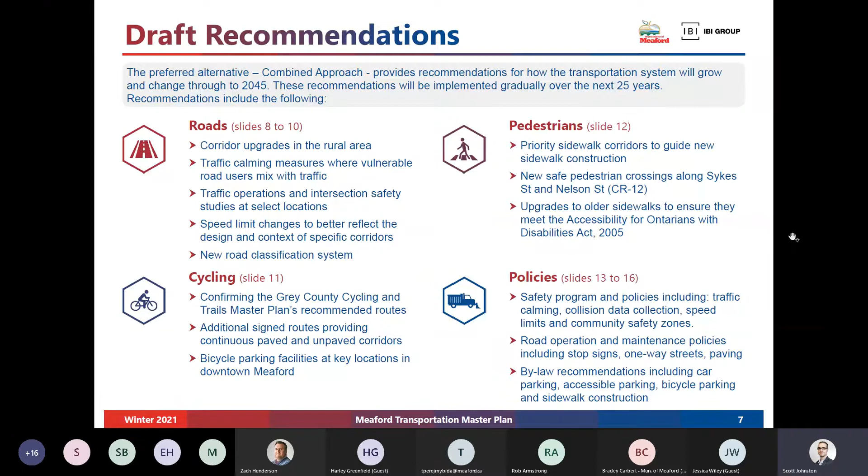So those are the broad recommendations. I think it's worthwhile pointing out that the TMP has found issues, and we've got recommendations. Not all of these recommendations are expensive, but there's quite a few good things in here for the municipality, and we'll explain what those are.

Starting off with rural roads. Through our review and problem assessment, we came up with these preliminary recommendations for rural roads. I should mention that we are gathering feedback on these, and so we'd like to hear your thoughts as well, and we're in the process of gathering feedback.

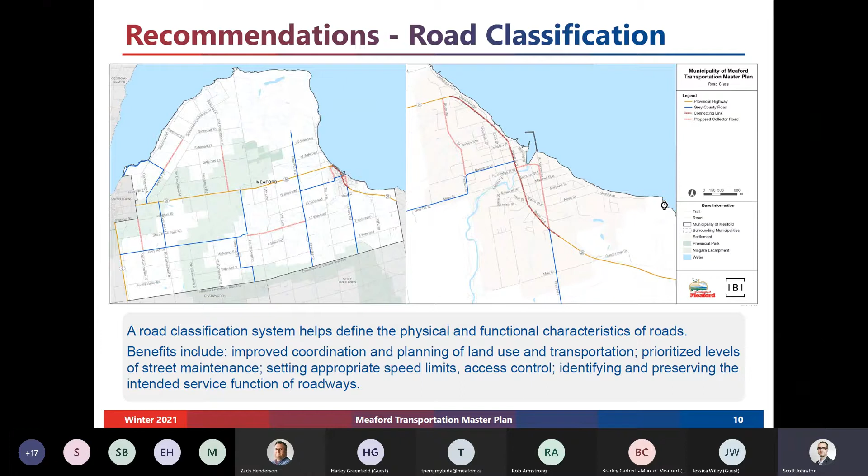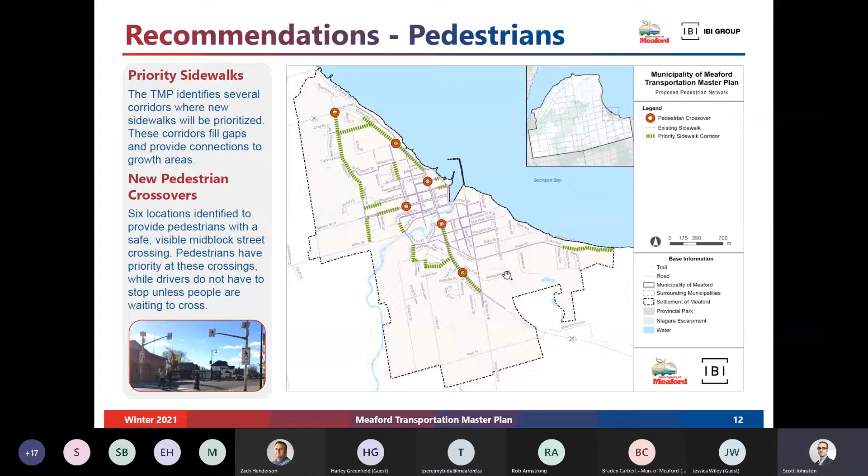Just to mention, this is a great example of infrastructure that doesn't necessarily cost a lot of money. They're quite cost effective and really can provide an enhancement to the look and feel of Meaford, making it safer to cross the street for people.

Okay, so there's several more slides of recommendations. I'll try not to go through them in quite as much detail as the previous one. Everyone is welcome to look at the slides and provide feedback, ask questions, specific or general. All questions and feedback are welcome.

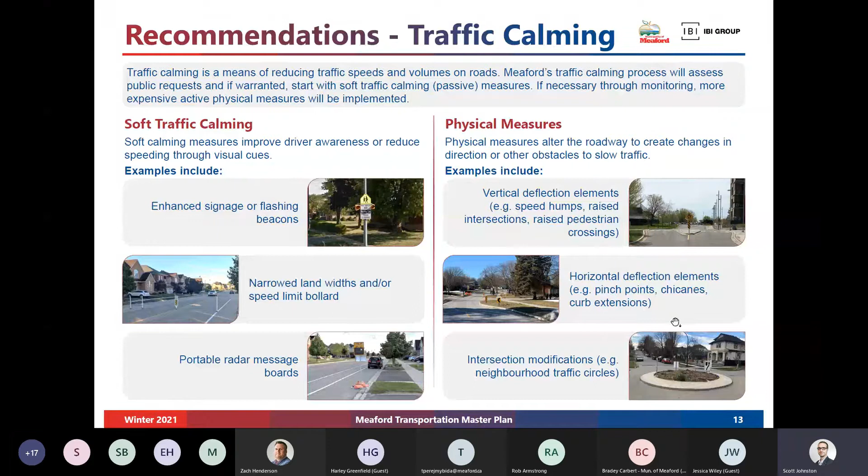So that's traffic calming. Looking into other policies and recommendations: a road safety policy and program. Safety is a priority in managing and planning the network. The recommendation here is for the municipality to review collision data, collect it regularly, and review it, looking for problem locations that have excessive numbers of collisions, and then on a case-by-case basis reporting those findings to council to determine next steps.

It's important that resources are limited. The municipality can't necessarily address every problem location or every location where there are collisions, but by looking at the data, perhaps identifying priorities and the need for capital budget to address safety improvements over time, and also coordinating with OPP. Traffic calming we sort of covered. Community safety zones are another policy area.

Community safety zones typically have lower speed limits. One of the challenges the municipality faces is enforcing those. The police typically don't have enough resources to stringently enforce the community safety zones. So one of the items we identified was to consider partnerships with the county or others into automated speed enforcement, as a way to improve compliance with community safety zones.

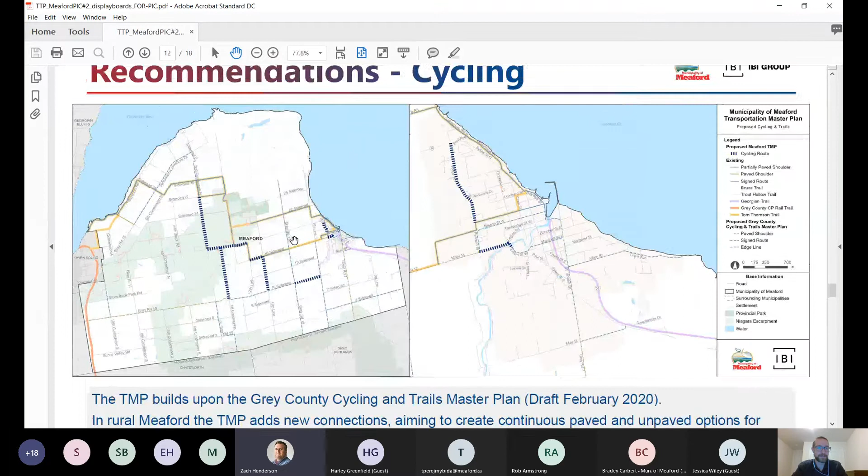Sure. As Zach said, we're trying to look at the needs and opportunities, recognizing that cycling is actually a rapidly growing tourism industry. Touring cyclists are a growth area of the economy, and Meaford has great roads for cycling. Today, there's no paved access for cyclists to get to the northern parts of Meaford, so that was a gap we identified and thought could be addressed through the paved loop, which serves more functions than just cyclists, but the cycling network could take advantage of it.

So we want that mix of paved and unpaved options in the rural parts to support the economy, and in the urban parts, there's also support for touring and recreational cyclists. There's potential for cycling infrastructure, signage, and routes that increase driver awareness and help with safety, along with potential bicycle facilities on some of these roads, since they can improve safety as well.

Scott mentioned the paved loop, and how we're calling it a cycling route but also a collector road. Bill Abbott had a comment about that: how do we reconcile directing more traffic toward a cycling route? How do the two things coexist in this plan?

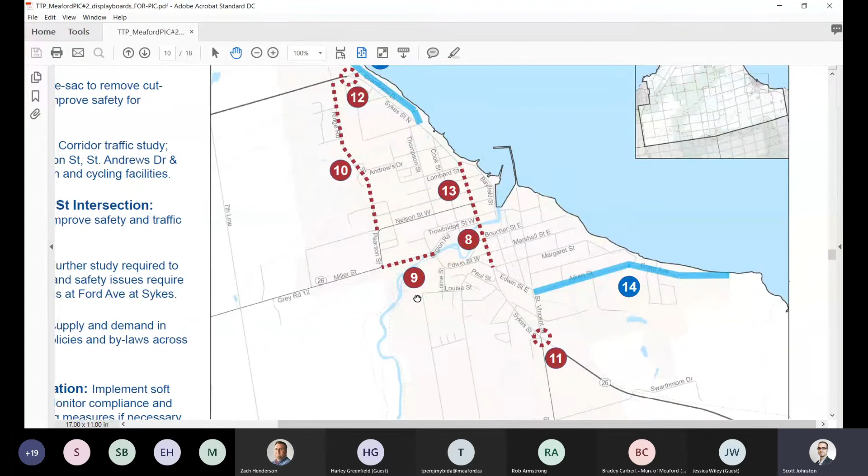I guess for the purposes, one of the things we probably could have done was prepare the aerial image, but for this presentation, this map is probably sufficient.

So right from the get-go of the TMP, we heard both from staff and from the public in our first consultation that safety along this street is really a concern. It's narrow, there's no traffic protection, no guardrails adjacent to the river as it gets close to Edwin Street, and we also heard that some traffic is traveling much too fast on this road.

That was kind of the reason we looked at different alternatives. There's even another concern up at the Sykes Street intersection of potential sightline issues for crossing, because of the bridge over the river.

So we were looking at different alternatives. It was actually an idea that came, I believe—Tori can correct me if I'm wrong—originally from the public, a comment that this road could be cul-de-saced. The concern was that this road may be being used as a through route for traffic from the west, but it is a residential street and currently not designed as a collector road to accommodate that through-road function.

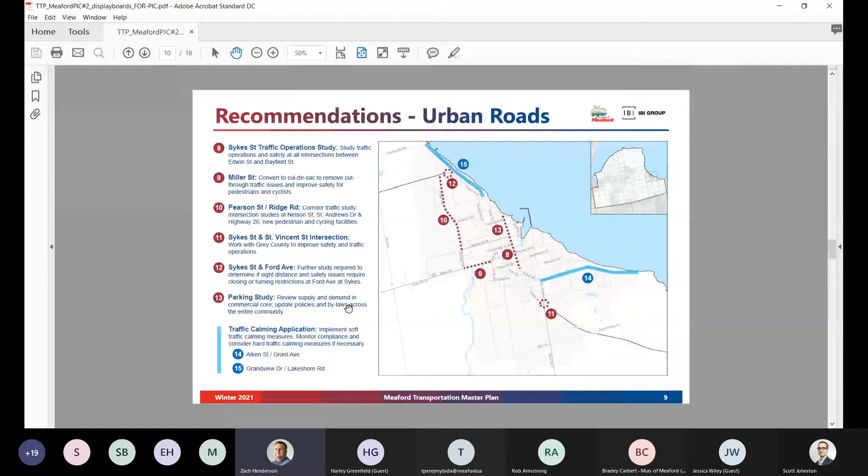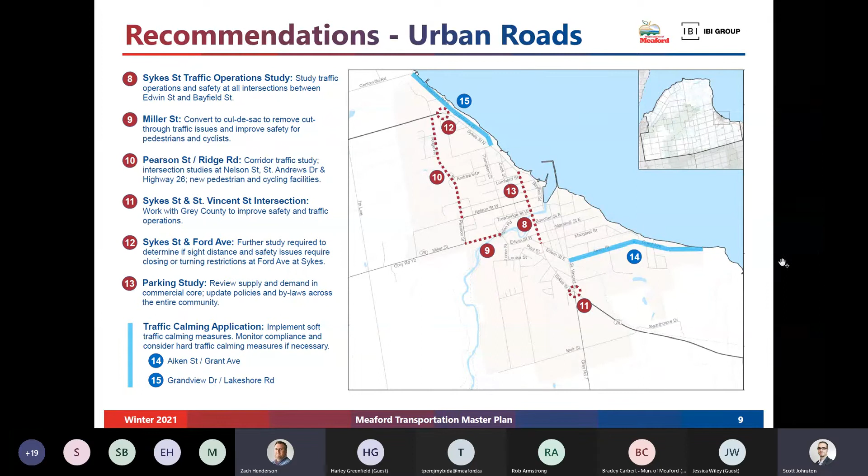This is actually part one of the Miller Street question, but it relates to how we are going to do traffic calming on some of the rural roads. Traffic calming maybe evokes a sense of more urban activity, but how are we going to apply it to slowing down traffic near some of those pockets of population areas that are on rural roads?

That's a good question. From my perspective, the policy that we developed would generally apply: when concerns and requests come to municipal staff, they would review it, assess whether action is warranted and justified by looking at the speed of traffic and the volume of traffic on the road, and if justified, follow a similar process of soft calming and then consider other interventions.

Now for rural roads, the toolkit is a little more limited—the types of tools that could be used, like placing signs and so on, might be more constrained—but generally that process would be followed. I'd also point out that the other recommendation is that speed limits would be reviewed on an individual basis, following best practice guidelines.

Tied to the traffic calming and safety program, speed limits could be looked at by staff using the provincial guidelines, and considering a reduction in speed limits.

I'd like to add to this, hasn't been shared publicly yet either, it's kind of too detailed for that. Part of our approach on traffic calming is to provide a transparent process everyone can follow. In rural areas, recognizing that some streets have low volumes, even if you have 100 speeding cars a day, that's still a significant hazard. So we look mostly at speeds in rural areas rather than relying on some sort of volume that may never materialize.

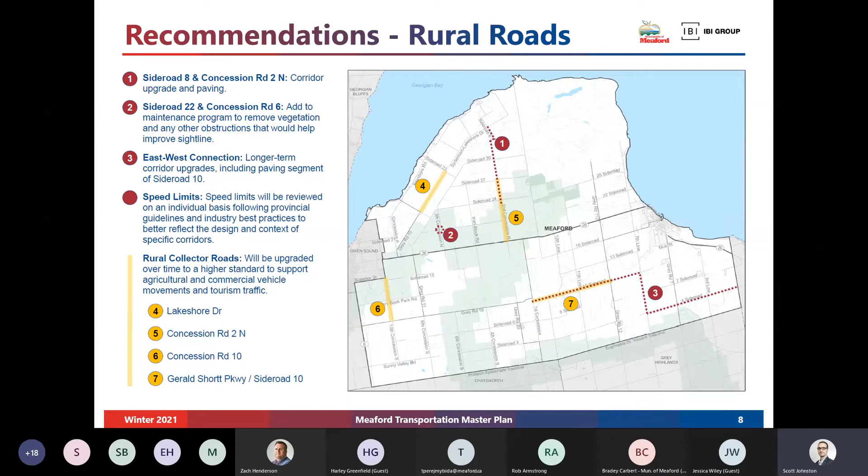That's a good comment, we can take that back and talk about it with the project team. I think that's a great comment. When you fill out your comment sheet, if you can mention specifics like locations where you think there's a parking shortage that wasn't considered or wasn't mentioned today, we'd like to hear that in your feedback.

During our first round of consultation we asked about parking, and I don't recall we got a lot of comments, as we saw earlier over 300 responses to that survey. I can't offhand recall any complaints about a parking shortage. There always kind of feels like there is, but it hasn't made it into the plan at this point, though it's definitely something that can be looked at.

Okay. Got all out of order here. Sorry, just bear with me for a second as I try and find something new to discuss.

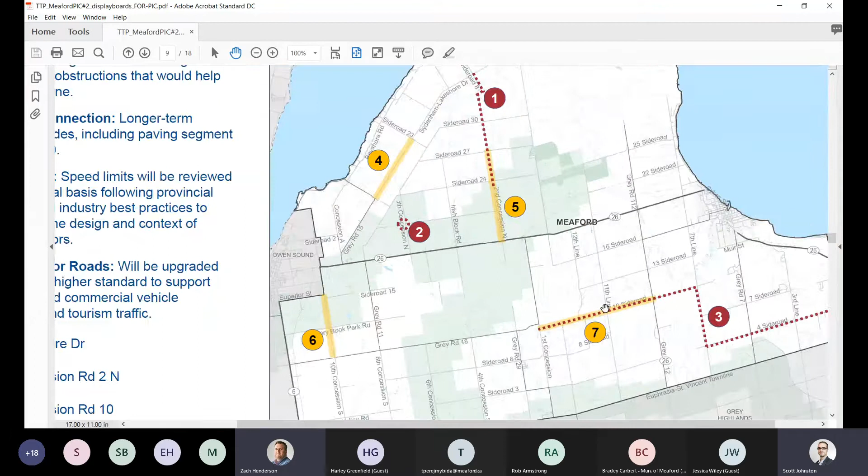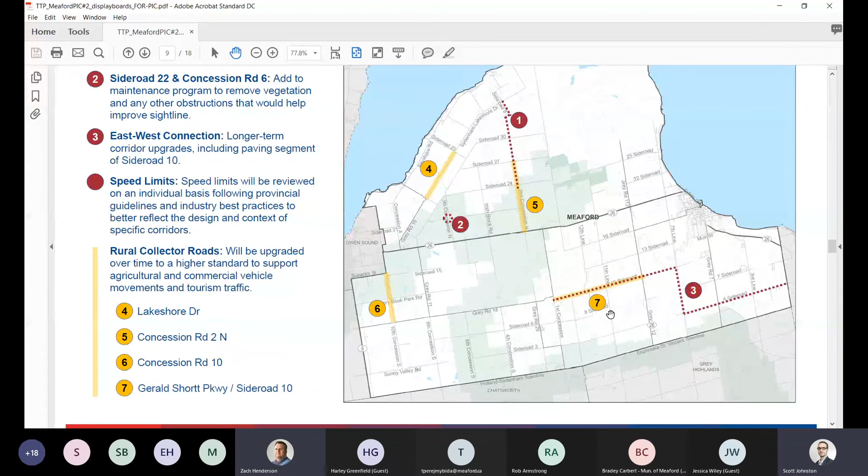Okay, so I guess another question regarding Sideroad 10. Scott, you actually did mention this a little bit, maybe we can reiterate it. Bill Guest was pointing out the major vertical curves on that road and how we are going to deal with that, and how is it going to be possible to design something where agricultural vehicles can use the road still, as well as trucks. That's the kind of concern we have.

Yeah, it's a valid question. We're trying to develop a plan that targets, you know, we're looking fairly far out, 25 years into the future, so we don't want to be too constrained where there could be a potential cost of improvement if we feel it's valuable. One of the comments we heard quite strongly, both during the public feedback round 1 and through our consultation with the agricultural community and industry, was that there is a need for an east-west connection.

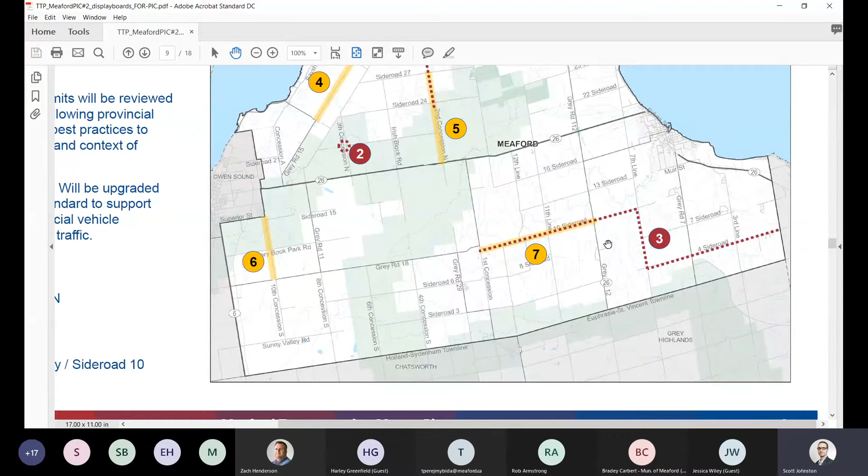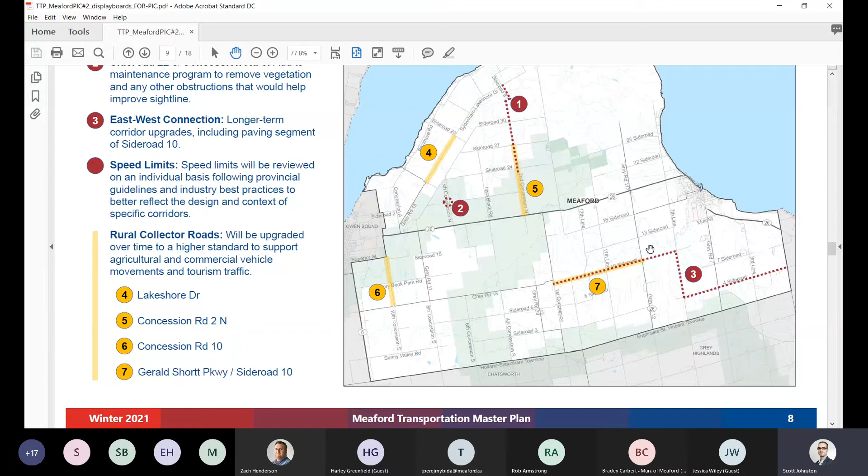But we do recognize that the gradient would be a huge barrier to actually making a proper collector road that meets appropriate design standards, and that type of investment would be too high for Meaford to bear on its own. So what we've identified is that it could be upgraded as a cycling route or designated as a cycling route and put into a long-term plan. Roads like this that meet an identified need in a transportation master plan can also open up other funding opportunities such as provincial funding, so there's value in putting those desires into the plan. I'm not sure if I fully addressed that question, but we do see the value of it from a cycling perspective and from a connectivity perspective for goods movement.

Okay, thanks Scott. I'm kind of running out of questions, but I have a couple comments I'll add in here. Okay, now if I can find them again.

So the new school is at the southeast corner there of St. Vincent and Sykes. Yeah, right there. So that's a good comment.

And so on the county cycling plan, St. Vincent Street is identified as a cycling route, and it does fall on that plan. For our plan, we haven't identified other roads in this immediate area to be added to the county cycling plan, just that it would remain as St. Vincent Street for the primary cycling route. I believe Sykes Street itself, I don't know if there's too much opportunity for converting that into a cycling route. So I think it has been captured in the cycling plan, the new school, but...

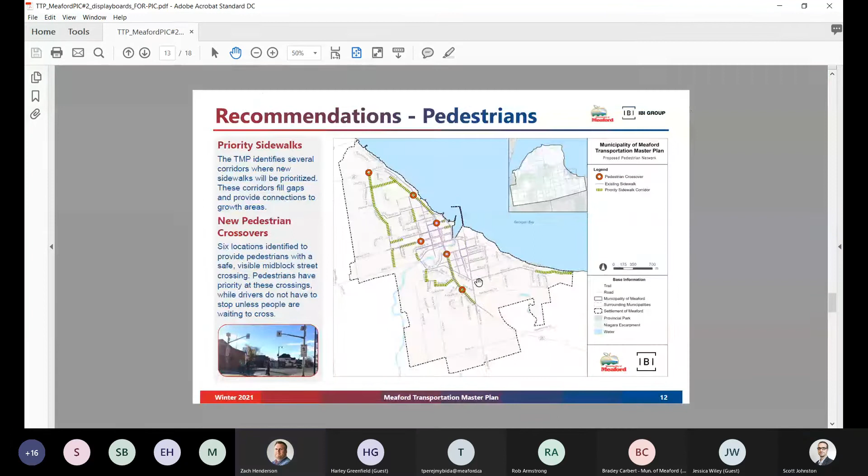Oh, that's a great addition, thanks Zach. Yeah, and if you want to just flip to the sidewalks, maybe quickly. Sure. I think one of our priority corridors there is extending the sidewalk on both sides of Sykes to make sure we reach that school, and also providing a crossing opportunity at Coleman Street there, which could help some people get around that area and towards the school.

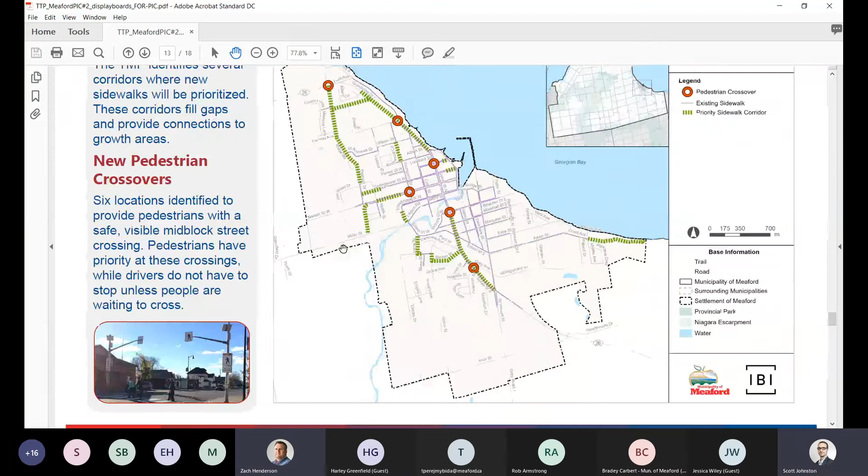Okay, I've got a new question here from Ross Kentner. Have you looked into the challenges that agricultural traffic has in the Bognor area with the steep hills, especially in the winter?

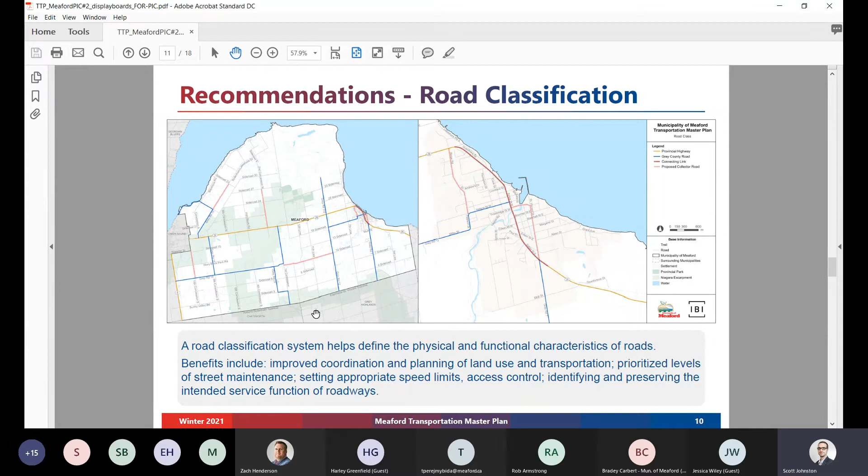I would say that we have looked at it, and it did form part of these recommendations. Sorry, I'm going to go to the rural roads plan. And I would say that we're continuing to engage Stefan, one of the representatives of the agricultural community, and we're looking further at the Bognor area and the needs as part of the consultation that we're doing right now.

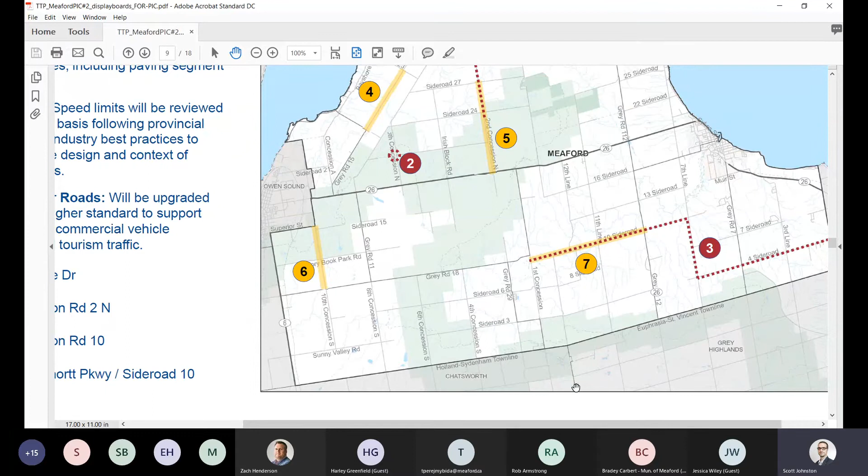So if you have any specific comments about this area, we would like to hear them. This was the plan that we developed so far, and we're interested in gathering further comments on the Bognor area specific needs. Yeah, we'd definitely really like to hear input on that specifically. Please do submit your comment form, and we like to hear specific comments about your feedback there.

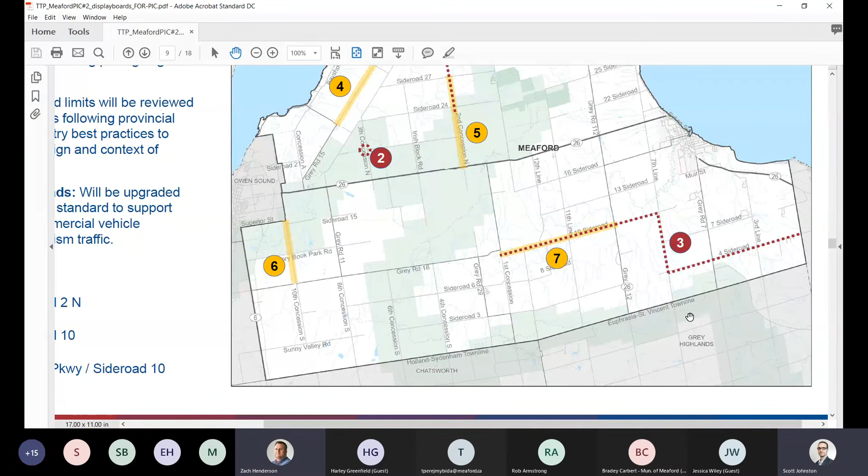Can you flip to cycling real quick? I'm just going to quickly address Ross's follow-up question here. Sure.

So Ross, you just noted that you don't see the Georgian Trail, but it's there in kind of like a light purple, maybe a little bit light. If you go to the urban part, Scott. Oh, I see, yeah, the Georgian Trail there connects kind of downtown Meaford over to Thornbury.

Hopefully that addresses it. So, for the record, Ross says there should be provision for people to walk and cycle as much of the shoreline in urban Meaford as possible. That's something I think is looked at as part of the waterfront master plan that Meaford has done. I know there's some good stuff there, but from a transportation perspective, we're highlighting corridors. We haven't highlighted anything specific along that waterfront, although there are a couple segments where there's little gaps in the sidewalks.

Okay, so Jessica followed up on Miller Street. I don't think we're going to have a good answer for this, but do we have a timeline in mind for Miller Street changes? No, I think the answer is no right now, but...

Basically once the TMP is accepted, then generally what that means is that the need and justification for a project is established through the EA process, through the provincial process. Once a project is identified in a TMP and the TMP is finalized, then the municipality is permitted to proceed with phase 3 and 4 of the EA, which is design solutions and implementation. So basically the municipality would have the flexibility to start looking at implementing that within the next 10 years, timing to be determined. Tori, please jump in if you have any thoughts on timing that I didn't cover.

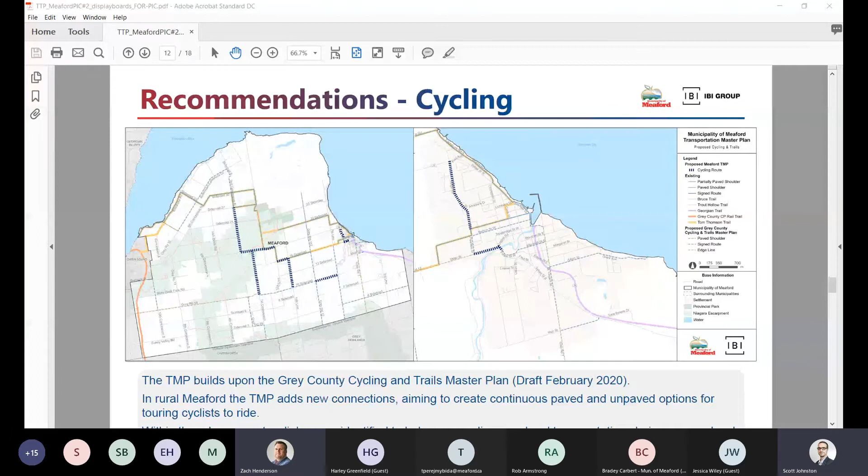Question about pedestrian crossovers: how will they impact traffic on Sykes Street? Sykes is obviously a very busy road. If we're proposing a bunch of crossovers, how is that going to impact travel times, bottlenecks, that kind of thing?

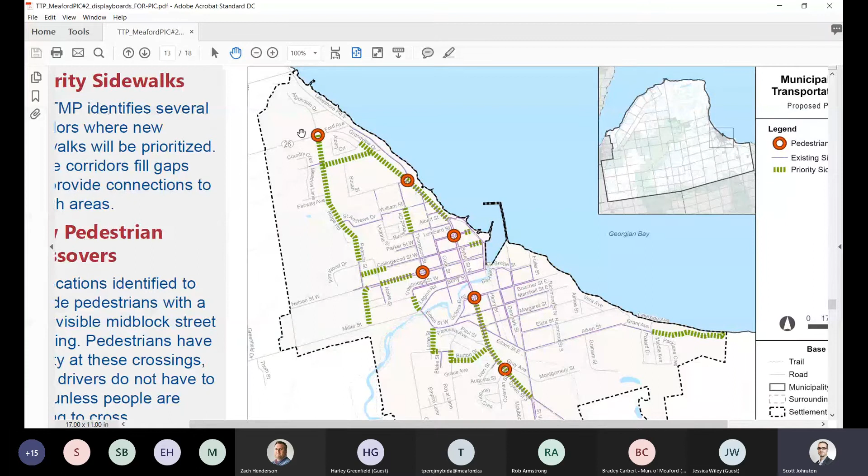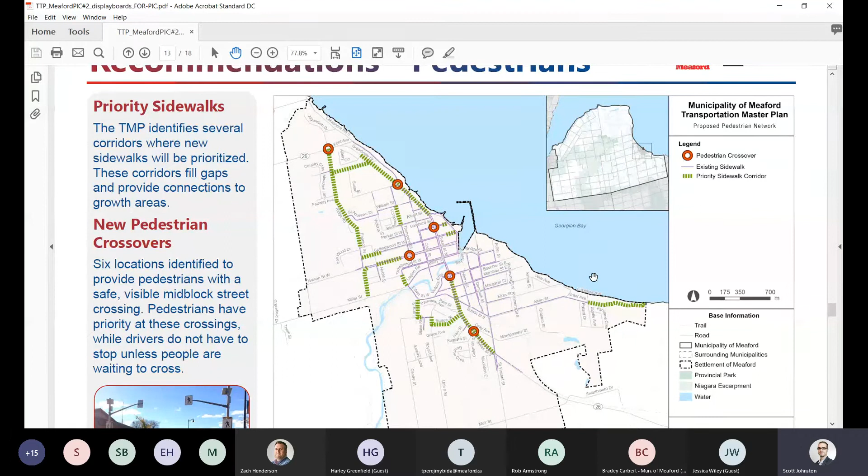That's a good question. We haven't done a specific traffic analysis of these locations, but generally pedestrian crossovers don't cause significant delay to traffic, because the number of times per hour they get cycled is relatively low. And as you know, there's already gaps in traffic provided by the signals along Sykes Street, so it's not too different than traffic signals in terms of the short-term delay for drivers needing to slow down and stop for a pedestrian crossing. The delay is actually quite limited, because once pedestrians are clear of the roadway, drivers are permitted to continue through.

It's kind of a trade-off. The alternative is a full traffic light, where you have to wait whether there's pedestrians or not a lot of the time. In my experience walking and driving around cities, you see a pedestrian, it takes them 10 to 20 seconds at most to cross the street, and then you're on your way again quite quickly. Okay, hopefully that answered the question.

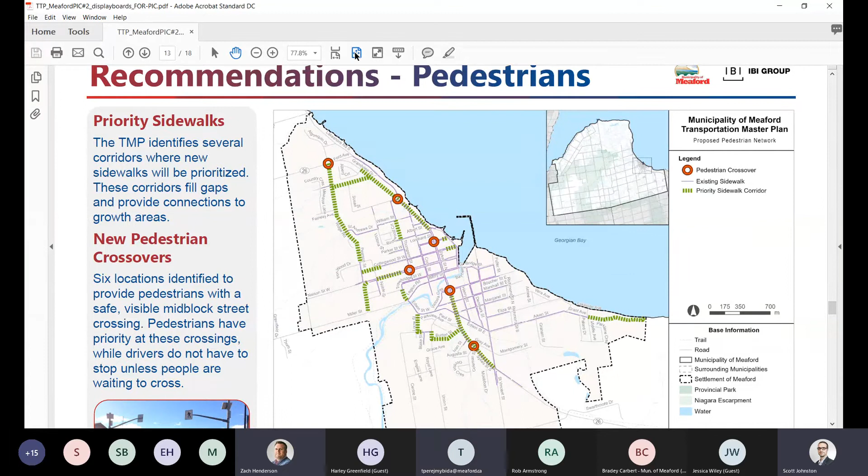Let's talk about Pearson Street and Ridge Road. The question from Shirley is, if this corridor is becoming part of our collector network, how would traffic calming and speeding be controlled? Would there be additional stop signs or reduced speed limits? So what's the overall vision for this corridor, Scott, if you know? And I can jump in as well if we need to. Sure, please jump in.

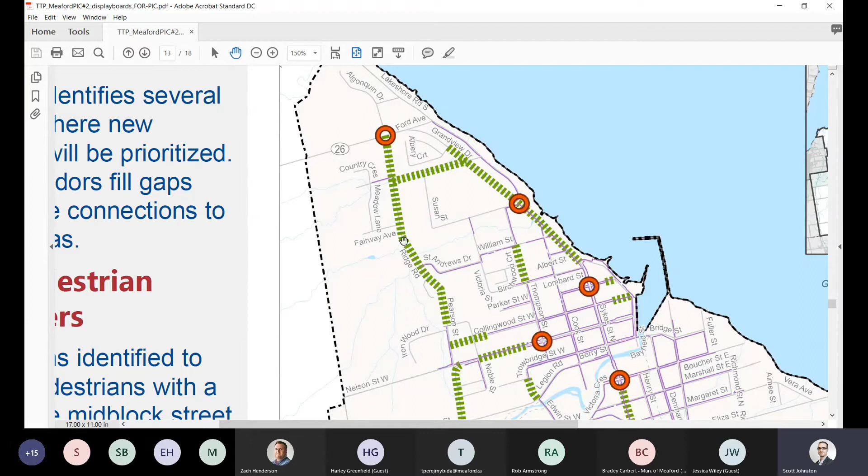Through the TMP, we've identified that this is an important road for the northwest part of urban Meaford. It provides that important connection to Highway 26. There's developments along the road, and it provides access to the hospital area and to downtown for residents. Because we've identified it as an important road — today there's no sidewalks, it's quite a narrow road — it was identified both for sidewalks and for further study through the traffic operations analysis to look at issues like traffic control.

For example, the intersection of Pearson and Nelson Street has quite an awkward geometry that needs to be looked at in more detail through traffic study, and potential traffic control up at St. Andrews and Ridge Road needs to be investigated further. It's important to point out we're asking this corridor to do a lot of different things. We're calling it a collector road, acknowledging there's going to be a lot of development — the development at the golf course, more homes going in north of there, and even north of Highway 26 — proposed developments that could feed into this corridor potentially.

But we also recognize we've heard a lot in the first round of consultation about unsafe speeds and lack of pedestrian and cycling facilities, most notably pedestrian. So we haven't really looked at it in terms of traffic calming per se, but it's one of our key priorities — near the top in terms of priority sidewalk corridors. We're hoping to address that issue that way. It's also part of the cycling network we've identified, so as traffic volumes increase, there will become a need for potentially bike lanes, or maybe a multi-use trail instead of a sidewalk that can combine both. We're asking it to do a lot, and it's going to be a bit of a challenging project, given the constraints with the width of the road and things like that.

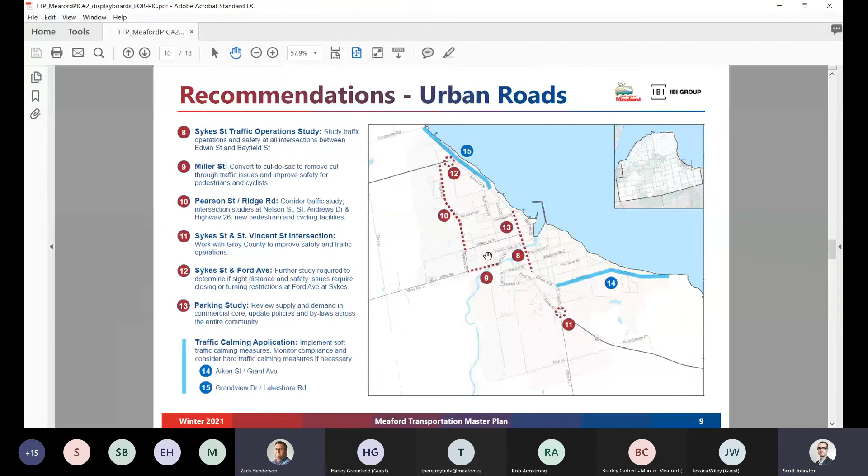I think so, yeah. Okay, I'm going to switch gears back to Miller Street, just to get back to that concern about traffic being forced onto Nelson and into the intersection at Sykes, and then to Trowbridge through to across the bridge there. How do we propose to manage extra traffic? Do we think there's going to be quite a bit of volume shifted over there? Is that something that needs further study? How can we deal with it if it does cause a bottleneck there at Nelson and Sykes?

So I would say that's a good comment. Generally, the objective would be for more traffic to use Miller Street, Pearson, and the Nelson Street and Sykes intersection as a more desirable connection than Miller Street to Edwin Street. As mentioned earlier, if that were to be cul-de-sacked, there would still be connectivity to the neighborhood through the other roads provided in the local area. In terms of the traffic impacts of that connection, yes, I think that's a good point. Perhaps it could be included in the recommendations of the downtown study to assess any diversion of traffic from the intersection of Miller and Edwin to the intersection of Nelson and Sykes.

And just to add, right now Nelson Street and Sykes Street does have a light, and the intention of a lighted intersection is to provide flow of traffic when you're seeing high volumes in both directions. Currently, Sykes Street sees significantly higher volumes than Nelson Street, so if there's added volume on Nelson Street, that light will be able to handle it. Whereas diverting traffic to Edwin Street, where it's just a two-way stop and an awkward intersection with Edwin on the east side connecting into Margaret Street, that intersection currently causes more of an issue with traffic concerns and safety. So by cul-de-sacing Miller, we may actually have safer travel into downtown from the west, because we won't have people rerouting to that Edwin Street intersection that doesn't have the stoplight you'd get at Nelson Street.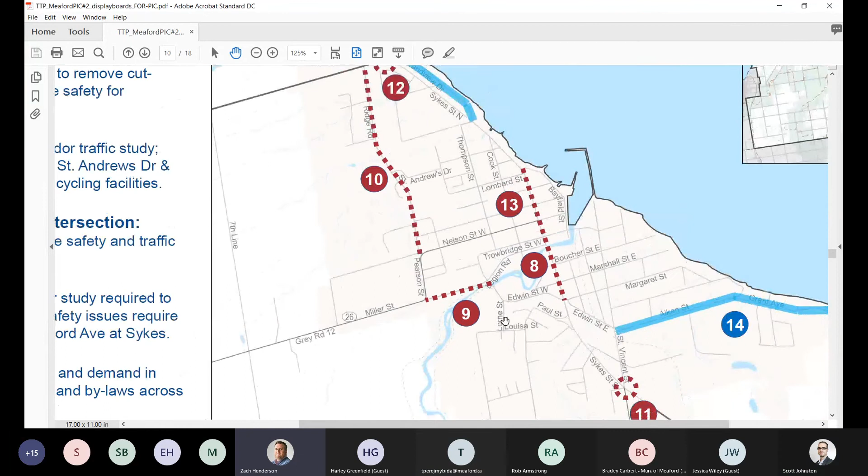Okay, I wanted to jump back to Pearson and Ridge Road. I had forgotten to mention this when we were discussing, and Shirley brings up a point here as well, noting that it's a main ambulance route from the hospital to Highway 26. She had also mentioned stop signs along the road as well.

I wanted to point out that stop signs are generally not a good solution to speeding traffic, and we talk about this in our traffic calming section - you guys haven't seen it yet, but it'll be in the TMP. The reason we're developing the traffic calming is to come up with better solutions, and one of our guiding principles on that policy is to not impede emergency services vehicles. So knowing that's a main route ambulances take would definitely come into consideration for the different treatments you might put in. We're not saying we're going to put traffic calming on that road at this point, but it's something that's definitely always considered.

Okay, anything else there, Scott? No, just looking. I saw another question popped up just recently. Yeah, I've got a new one here, talking about St. Vincent Street.

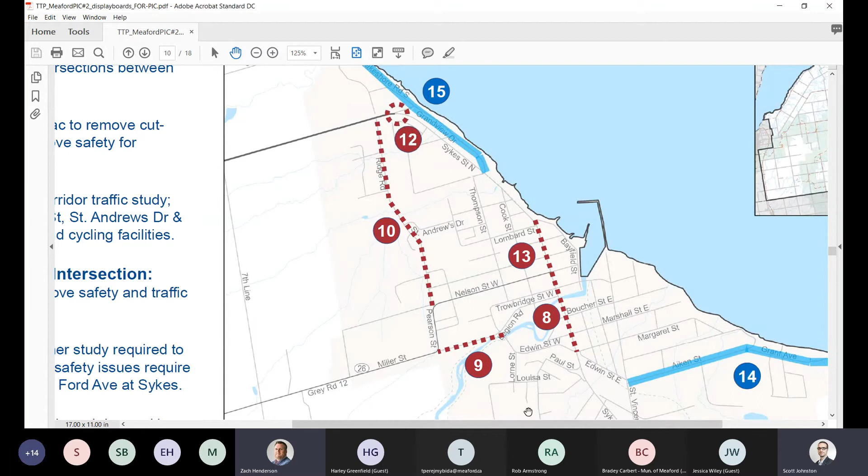Ross noted that residents have identified that parking should be restricted to one side on St. Vincent Street. That could be a safety issue. I think that's something the TMP doesn't look at in that detail, but we can definitely take this comment. Yeah, please put in specific comments like that, and we'll have a look at them as we're reviewing the feedback from the public. Typically those kinds of things have a way of making their way to the right people if you submit them.

Was there a discussion of a stoplight at Boucher and Sykes? I think - is it Boucher? Boucher? Oh, the pronunciation - yeah, I wouldn't know how to pronounce that either. No, but that was identified as falling within the limits of our downtown traffic study, so it would be looked at that time. Yeah, that is definitely something that could come out of that traffic study.

I think one of the issues that Scott and I have discussed is that there are a lot of connections to Sykes Street there. So on their own, they probably wouldn't have the traffic volumes alone to warrant traffic signals, but there might be a solution that comes out of that traffic study that can figure out how to deal with that.

Okay, so I think we're getting close to the end of comments. I think I've hit everything here. If I've missed you, please feel free to type it again just to get my attention. I think we've talked on everything here. If you have rebuttals, feel free to throw those in.

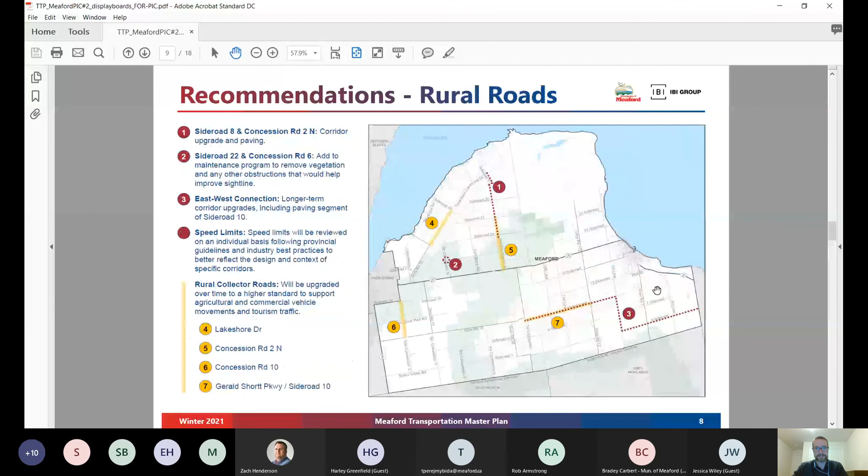We just received another comment here from Marissa. Has there been any consideration for safe cycling to and from Memorial Park, the main downtown area, and harbor? Thanks, Marissa. One of the maps we showed did have traffic calming, and we identified the sidewalks for Memorial Park Road for connection onto Aiken Street.

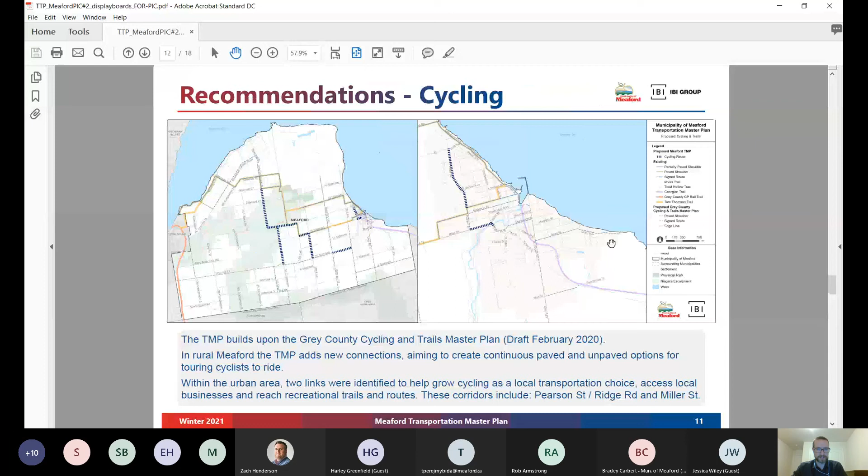Didn't the county plan identify that as a cycling route? Yeah, the cycling route the county is envisioning goes straight from Grant to St. Vincent, which you can then take into the downtown harborfront area. The county's showing those as signed routes—they're pretty low traffic streets, so that should be relatively safe with signs giving increased awareness, maybe some paint markings. That's the consideration.

She's hoping for a waterfront route. Right, I'm not sure they have one. We'll definitely record that and make sure people know about it. I think part of the problem is there just aren't a lot of roads in that section that go along the water, even Grant Avenue—there are houses between the road and water. The only real section that does is where you bend on Aiken Street to Lakeside Avenue, but it's a very rarely traveled road because it only accesses a couple of properties. So with the traffic counts, that's why we hadn't looked at it.

That's also why the county plan focused on providing cycling routes on roads with both higher traffic counts and access to locations. So in this area north of Aiken Street, there isn't anything for now—not to say there never will be—but that's why the focus was on Aiken, Grant, and then down to the harbor on St. Vincent.